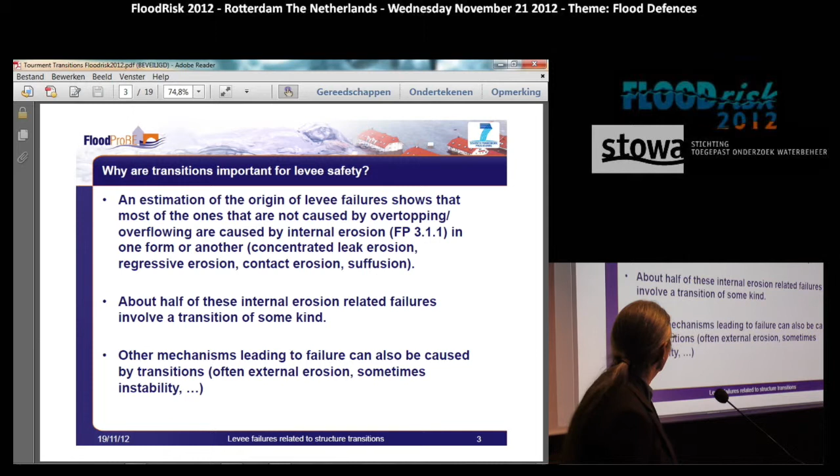So why were we interested in structure transitions? Because an estimation of the origin of levee breaches shows that most of the ones that are not caused by overtopping or overflowing are in some way related to internal erosion in one of its different forms. An estimate about the origin of these internal erosion causes shows that about half of these relate to some type or other of transition.

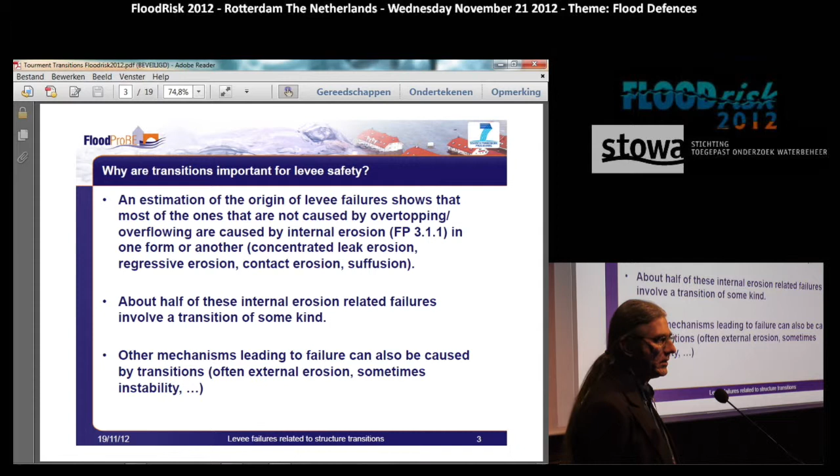Furthermore, other types of mechanisms can be related to the presence of transitions in the levees, particularly external erosion or even instabilities.

Transitions are usually weak points in levee systems, either because of the specific failure modes that can happen at the interface between the different sides of the transitions, or because of specific problems due to the design of these details, or even because of problems of management, because in many cases the management for the levee is not the same as the management for the structure.

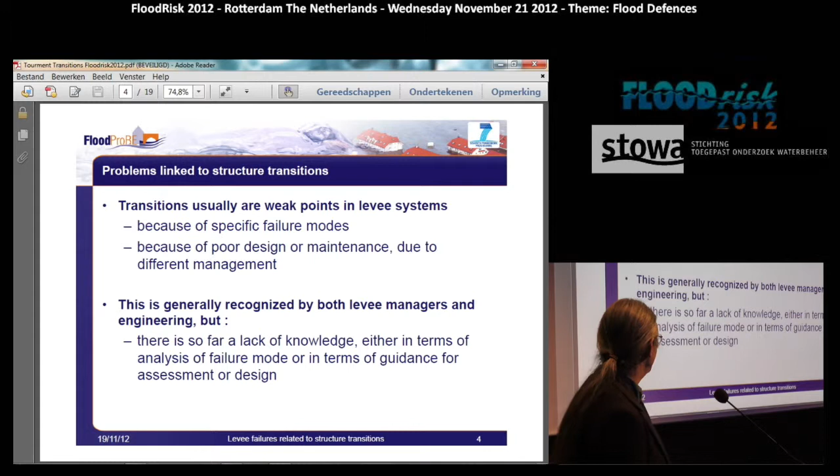This is very common in the case of pipes, cables, and such type of inclusions. This fact is generally known and recognized both by levee managers and engineering companies, but so far there is a huge lack of knowledge in specific analysis of failure modes of these transitions, as well as in terms of guidance, assessment, or design.

So these are just two illustrations of the problems that can be found caused by transitions. This is a breach that was caused by a pipe inside the levee, in the Rhone River. And this one is a breach that was caused by pipes, as you can see here.

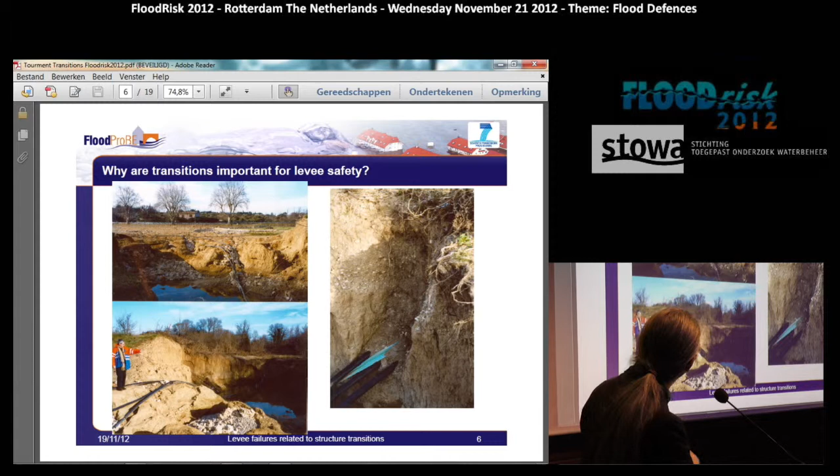You can see the trench where the pipe, the cables, were before the breach happened, and you can see this from different angles. So our work was made in 4 steps.

First, we made a review of different events where defense failure occurred and could be linked to structure transitions. Then these events were analyzed in order to produce a typology of the different structure transitions.

Then for each of these types, at least most of them, a template was filled, including description of the transition illustrated by photos and drawings, the potential problems, and the ways to detect both the transition and the possible problems already happening due to the presence of the transition.

And finally, in terms of general principle, design guidance for new construction, the potential repair or retrofit solutions in case of poor design or construction.

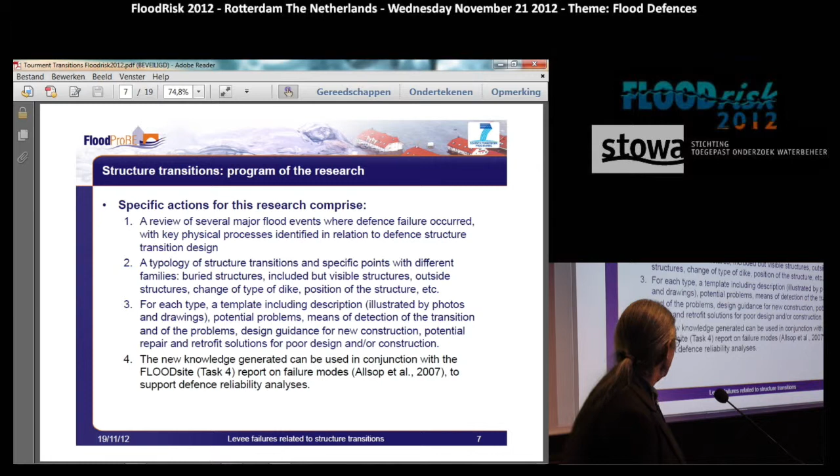Finally, in our report, we present how this new knowledge can be used, in conjunction with the FloodSite task 4 report, in order to update the way we work on defense reliability assessments.

So this is a list of the case studies which have been analyzed. I won't read it all. The report will be freely available, I think, as well as this presentation.

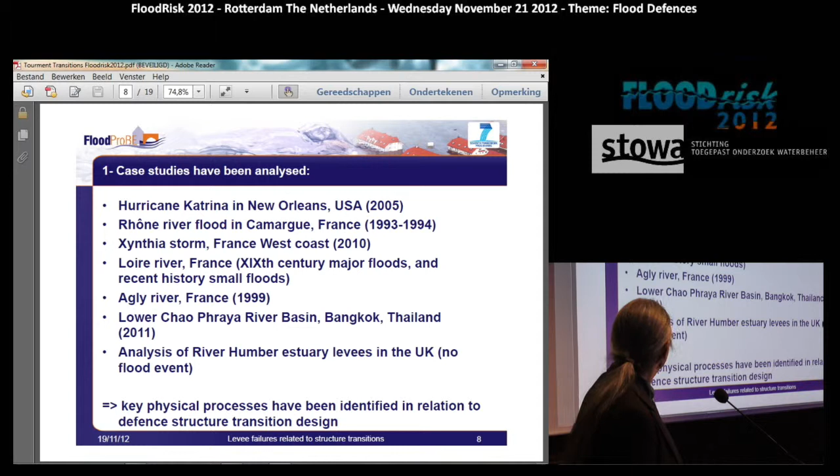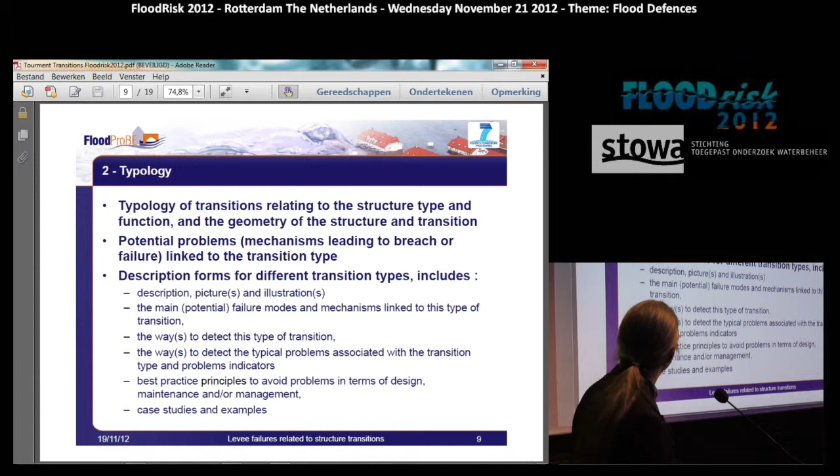So what is a transition? Is it between a levee segment and a structure being something which is hard, as opposed to something which is also an embankment object?

Or is it between the levee itself and its revetment? That may be something we didn't think about when we started the research, but a lot of interface problems are related between the main body of the levee and its revetment, or with a flood wall above the levee, or with another levee segment which can have a difference in cross-section, in revetment, or mixed, and also a flood wall adjacent to the levee. And finally, natural high ground, which relates to the same case as before.

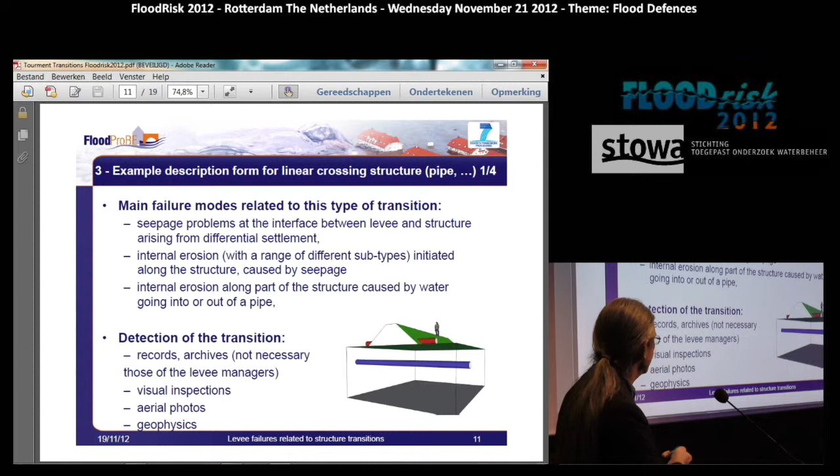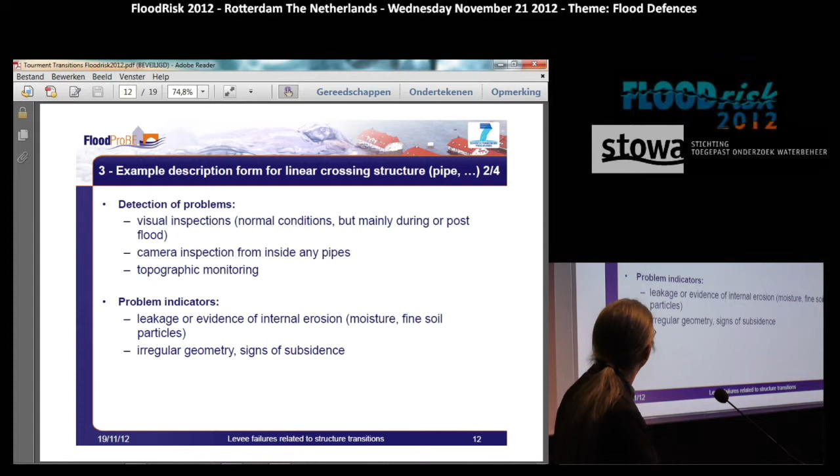So, forms. This is an example form for the case of what we call a linear crossing structure, which in most cases are pipes, with different headings. Because of time constraints I won't read everything, but these are the main sections: failure modes related to the transitions, how the transition can be detected, schematic drawings to better understand the type of transition, how problems can be detected or what are the problem indicators, and finally best practice in terms of design, repair, retrofit, and management.

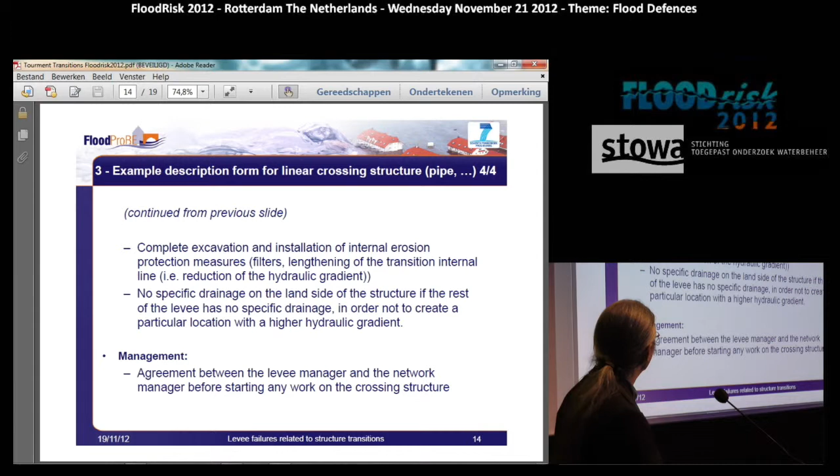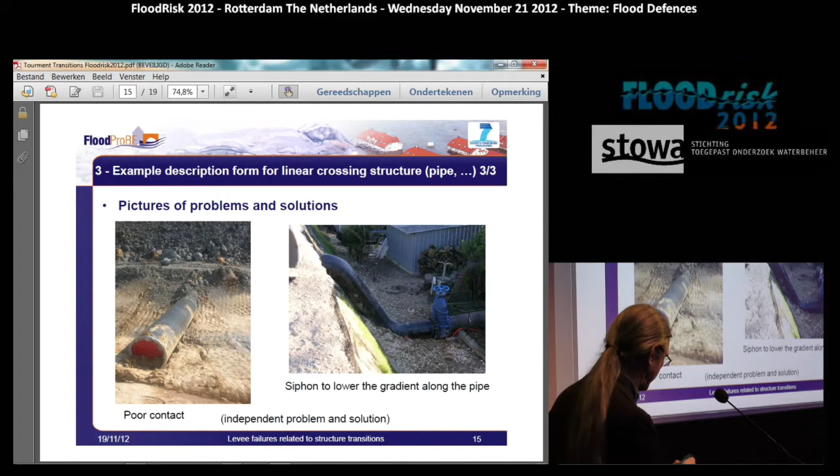As I've said before, some problems can arise because of management. Just to illustrate this, there are more examples in the report illustrating the form. This is one problem: a pipe crossing a levee with poor contact and no special treatment at the interface. And here is a solution, not related to this specific problem but to the problem of pipe transitions generally. In the case of a pressure pipe, we can adopt a siphon-shaped profile. This lowers the gradient along the pipe because most of the pipe is higher in the ground, so the gradient along the contact surface is lower. This is just an example.

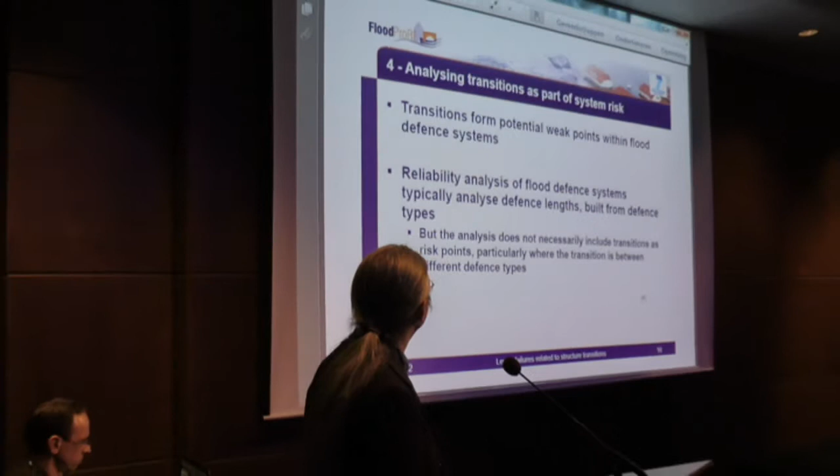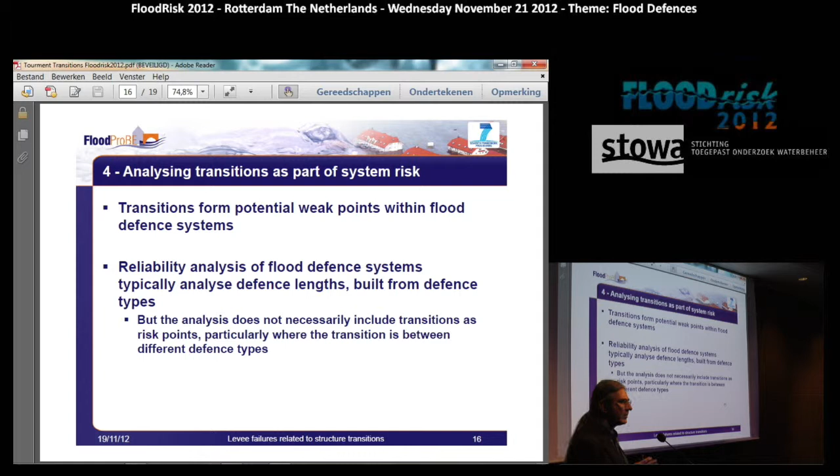The last part of the report analyzes transitions as part of system risk. Our analysis shows that the specific problems caused by transitions in levees are usually not taken into account in current reliability analysis of flood defense systems, because, as we've seen in previous presentations, these usually study lengths of defenses with homogeneous composition. Sometimes pipes or specific structures are analyzed, but most of the time we forget about the problem of transitions between different types of embankments and the specific internal erosion mechanisms that can arise because of different cross sections in embankment composition.

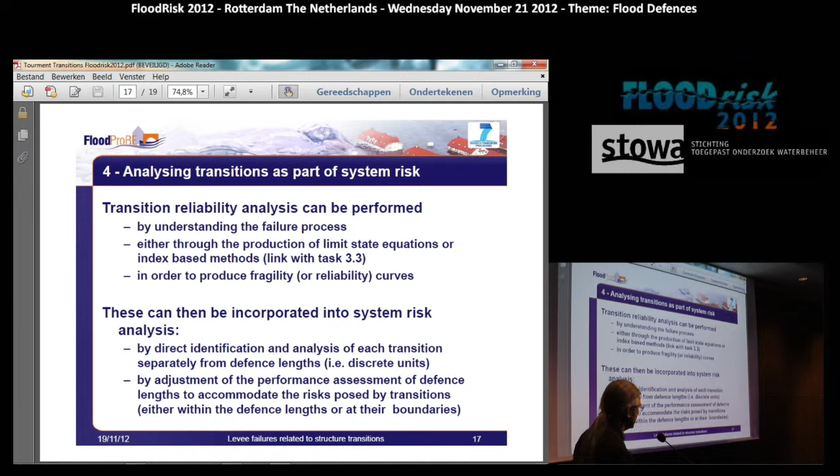So our proposition is that reliability analysis for transitions can be performed first by understanding the failure mode linked to this type of transition, then through the production of limit state equations or other assessment methods like index-based methods — this links to task 3.3, which describes and proposes improvements in assessment methods. We can produce fragility or reliability curves or other results for assessment, which can then be incorporated into system risk analysis. Then we have two choices: either directly incorporating the transition as an object in the length analysis, or adjusting the performance of a specific length of the levee. So it depends on the discretization of the levee used for reliability analysis.

In conclusion, we present a list of improvements that can already be applied to incorporate transitions into the process of levee assessment. We also found a list of remaining gaps, mainly in fundamental knowledge — the way to better understand some of these specific failure modes, for example what really happens at small scale between a hard structure and a soil structure — and also better tools to locate transition zones and characterize the physical phenomena that happen.

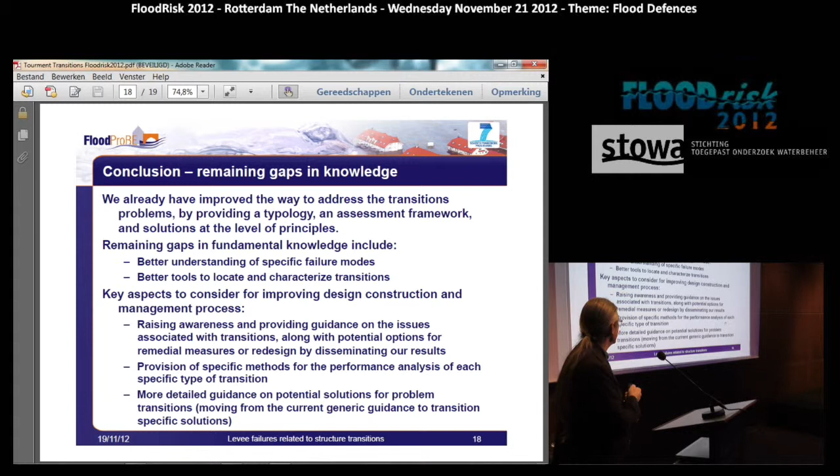The three final points are key aspects to consider for improving the design, construction and management process, which link to both the results and the remaining gaps in knowledge: raising awareness and providing guidance on the issue of structure transitions, provision of specific methods for performance analysis of each specific type of transition, and finally producing more detailed guidance on very specific types of solutions for transitions, moving from generic guidance to transition-specific solutions. Thank you.